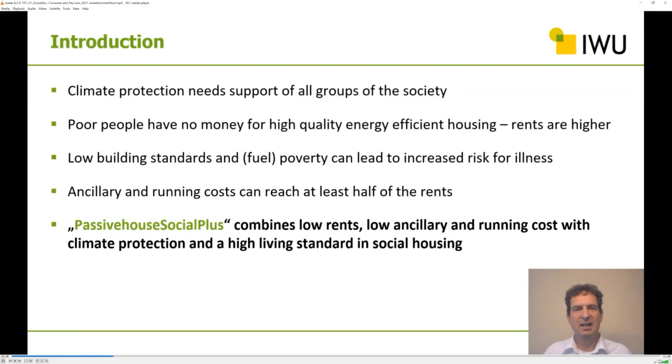These issues should be eliminated by the Passive House Social Plus, from an organization called Neue Wohnraumhilfe in Darmstadt. The Passive House Social Plus combines low rents, low ancillary and running costs with climate protection and high living standards in social housing.

The goals of the Passive House Social Plus were: build inexpensive flats for affordable living; significantly reduce ancillary costs for heating, electricity, and internet; achieve high energy efficiency for the building envelope, hot water preparation, household electricity, and system technology; use treated grey water to flush toilets; use photovoltaics and battery storage; apply a flat rate rent for most ancillary costs including heating and domestic hot water preparation, plus a budget for drinking water and household electricity included in the rent; and finally provide visualization of consumption and budget for tenants.

Now I'd like to show some pictures of the project. The building is situated on a former US Army military site. Here you can see the building before the retrofit - it consists of 3 stories with 3 entrances. Two of the three entrances were retrofitted with passive house components, and the third entrance was removed and replaced by a new building in passive house standard.

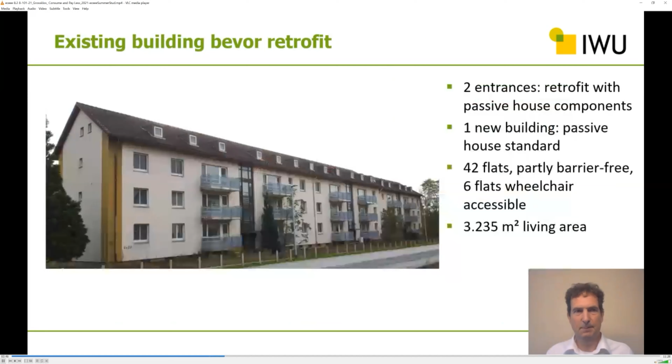At the beginning, the existing building was dismantled down to the building shell. A new top story was added to increase the living space. The building envelope was thermally insulated, and each flat has its own ventilation system with heat recovery.

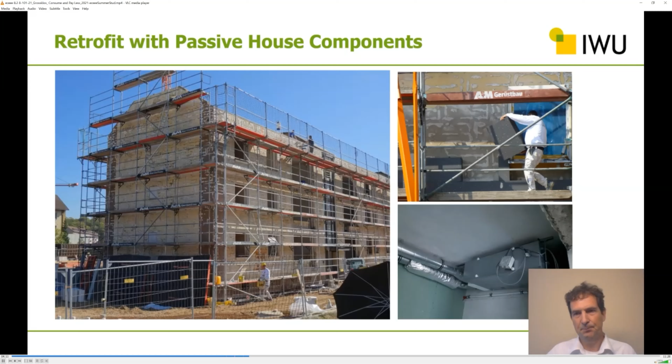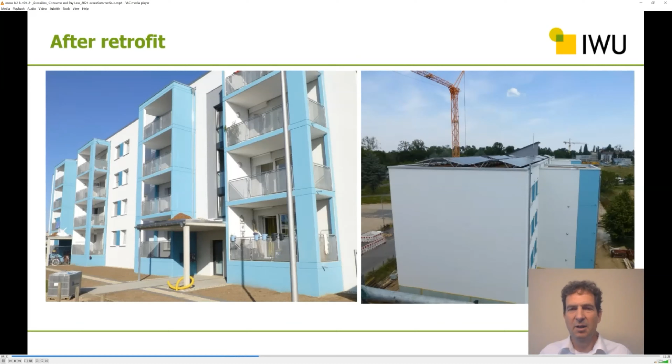You can see the existing building after the retrofit. On the right side, you can see on the roof of the building the photovoltaic system.

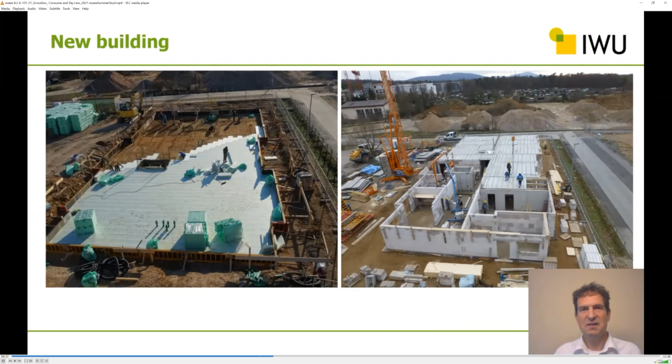Here are some impressions from the interior of the buildings. On the left side, a view of the barrier-free bathroom, and on the right side, a view of a kitchen, which is pre-installed by the landlord with very energy-efficient kitchen appliances, and also LED lighting in every room, to reduce energy consumption.

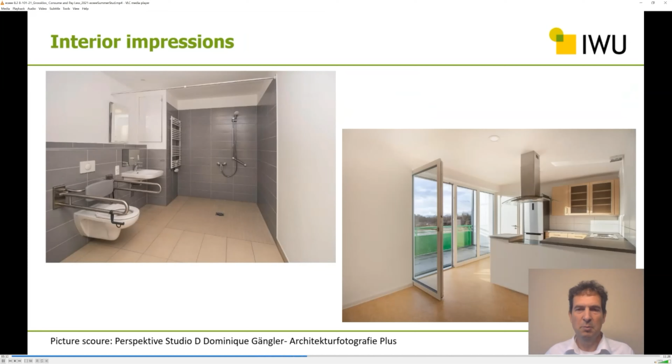As already mentioned, both buildings have PV systems. The existing building has about 40 kilowatt peak power on the roof and a battery storage of 18 kilowatt hours. The new building has about 44 kilowatt peak power PV and a much bigger battery with 43 kilowatt hours.

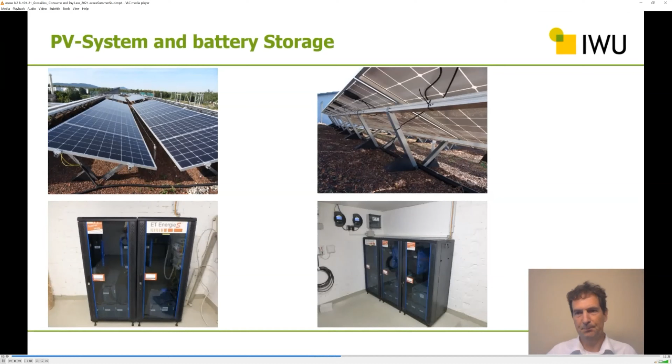Another important issue of this project is the grey water system. Slightly polluted water from the showers is collected separately, then filtered in the basement and treated biologically, and the cleaned water is then used for flushing the toilets, reducing the consumption of drinking water.

For the accounting, almost all ancillary costs are charged as a flat rate, including the costs for heating and domestic hot water according to German legislation. The costs for water and household electricity are not included as a flat rate but as a budget, and this budget is calculated so that an economical household can get along with it.

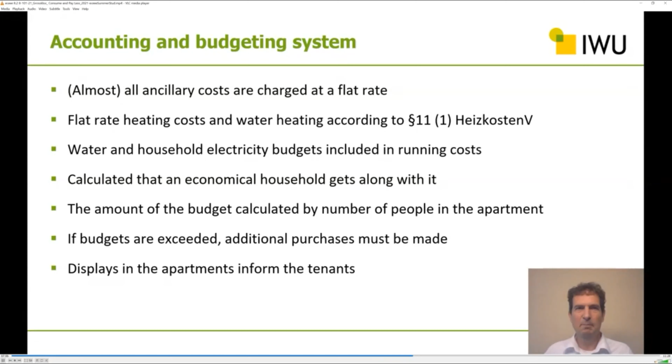The amount of the budget is calculated by the number of people in the apartment, and if the budget is exceeded, the tenants have to purchase an additional quantity. There are also displays in the apartments for the tenants to know how much of the budget they have used till now.

Here you can see one screen of the display showing on the left side the budget for electricity and on the right side the budget for domestic water. If the budget is exceeded, the tenants get a warning and a calculation of how much they probably must purchase.

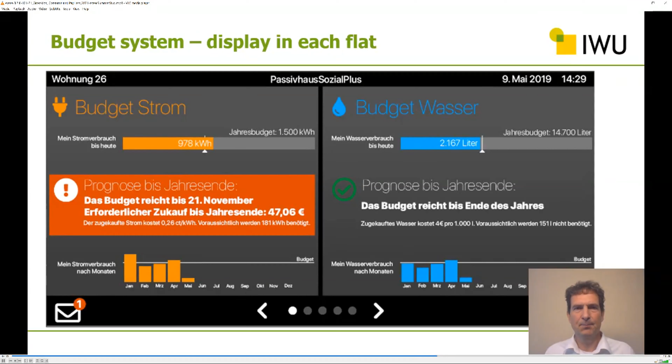The buildings were finished in 2019, and now I'd like to show you some results from the measurements for the existing building. The mean room temperature in wintertime was 22 degrees Celsius, which is comparable with other energy efficient buildings, even if they have a heat billing.

The measured energy for heating, including distribution losses, was 21.3 kilowatt hours per square meter and year, which is quite low. For domestic hot water, we measured 17.8 kilowatt hours per square meter, and the total consumption for district heating, including all losses in the building, was 48.9 kilowatt hours per square meter.

The grey water cover ratio for flushing the toilets was only 20 to 40% at the beginning. But last summer, a new filter was added, and after that, the cover ratio rose to values greater than 60%.

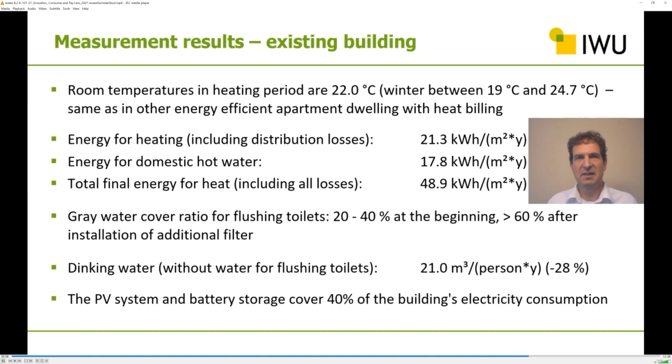The drinking water consumption, without the water for flushing the toilets, was 21 cubic meters per person and year, which is 28% below the comparable mean value in Germany. And the PV system, in combination with the battery storage, covers 40% of the building's electricity consumption.

For household electricity, I'd like to show you some detailed results. In this diagram, you can see on the x-axis the power budget per flat, and on the y-axis the power consumption per flat. The bisecting dotted line shows those points where budget and consumption are equal.

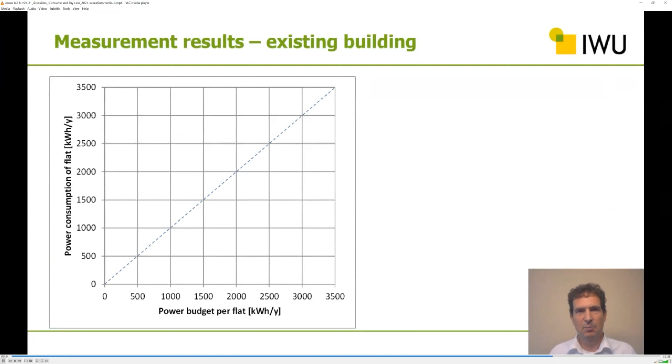Now you can see the results of the 22 flats as dots. Some are below the dotted line, meaning the consumption is below the calculated budget, and some are above. On average, the budget is exceeded by only 2%, which is remarkable because it was calculated according to the best energy efficient standard in Germany for electricity, Class A. So in total, the household electricity consumption is very low.

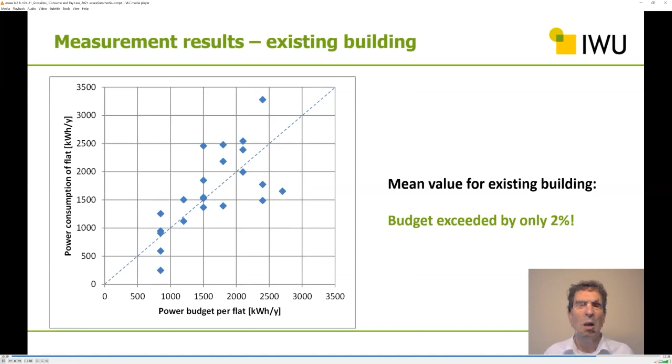Now I'd like to summarize the main results of the project. We have a high energy standard in combination with a ventilation system as a base for healthy living for the tenants. The rents are at €6.50 per square meter and month, well below comparable rents in the same city, which are above €10 per square meter and month.

The ancillary costs are 45% below those of comparable users in the same city. And despite the flat rate billing for heat and domestic hot water, we have very low heat consumption. The budgets for drinking water and household electricity are only slightly exceeded, so the approaches for reducing consumption and costs seem to work also in social housing.

Now I'm at the end of my presentation, and I'm looking forward to your questions.

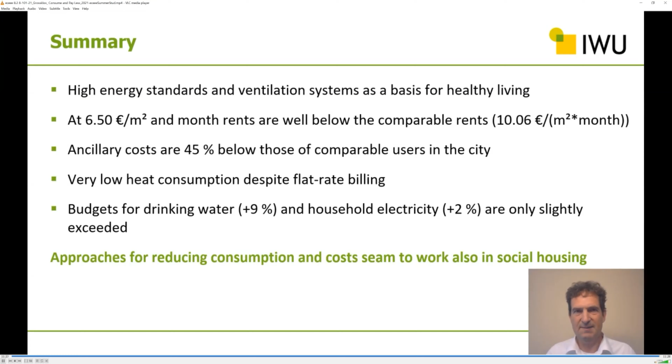I have a general question regarding setting up this system. Do you think it would be possible to have all the energy suppliers throughout Europe, or throughout the world, or throughout a city, to work with such a system? I think you've proven that it works, but the big challenge is getting energy suppliers to buy in. Have you had any considerations about that?

In this region, we have district heating, so every house has to be connected to it, and there's no question that the landlord has to use this energy source. Of course, in other regions you don't have the same energy sources, and maybe other solutions are cheaper. As discussed in other sessions this morning, in another region heat pumps maybe are financially more welcome, but this is a question for every special project. In general, when you reduce energy consumption, as with passive houses or nearly zero energy houses, all the houses have low consumption, so this isn't a special topic of this building or project.

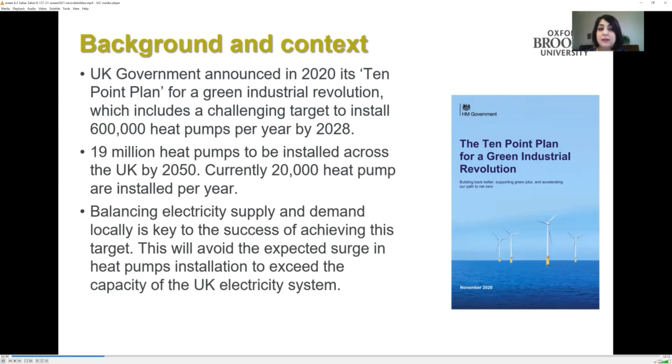In addition, 19 million heat pumps need to be installed across the country by 2050, which will be a step change from the 20,000 heat pump units currently being deployed across the country every year. To achieve this target successfully, it's important to balance electricity demand and supply locally, which will also avoid the expected surge in heat pump installations exceeding the capacity of the current UK electricity system.

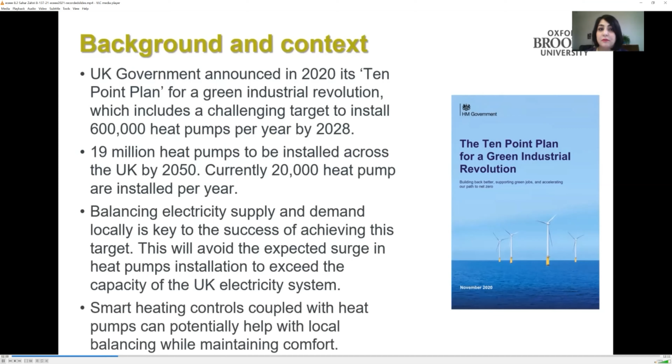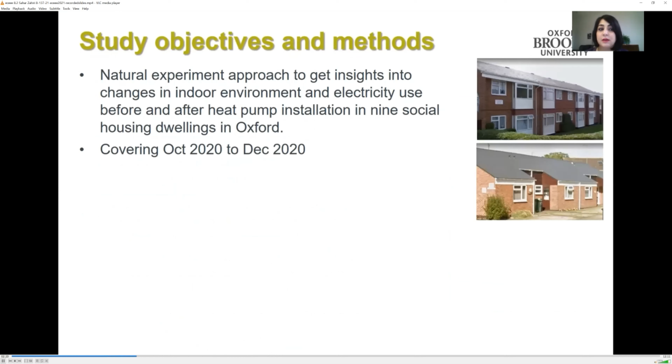Deploying smart heating controls coupled with heat pumps can also help with local grid balancing while maintaining resident comfort. With this context, this study used a natural experiment approach to get insight into changes in indoor environment and electricity use, pre and post heat pump installation, across 9 social housing dwellings in Oxford.

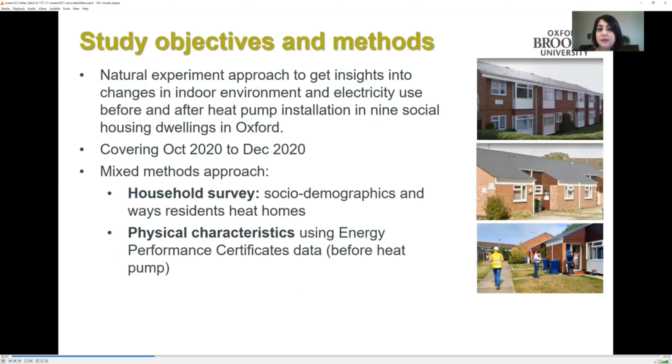The study used a mixed method approach, including a household survey to identify socio-demographics and ways residents heat their homes, physical characteristics using energy performance certificate data before heat pump installation, and monitoring of indoor temperature and relative humidity in 9 dwellings at 15-minute intervals using Bluetooth-enabled hobo data loggers located in the living rooms of each dwelling.

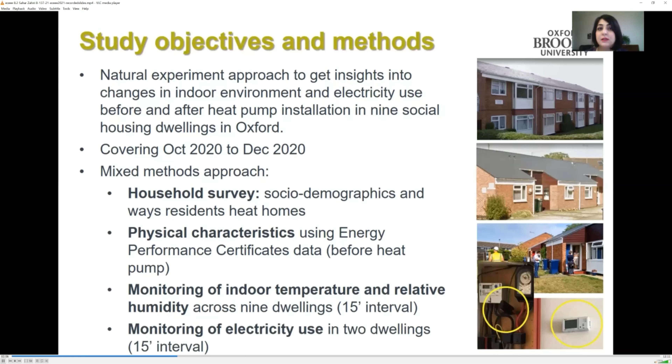Electricity use was also monitored in 2 dwellings with 15-minute intervals using a loop device, which was connected to the electricity meter of each dwelling.

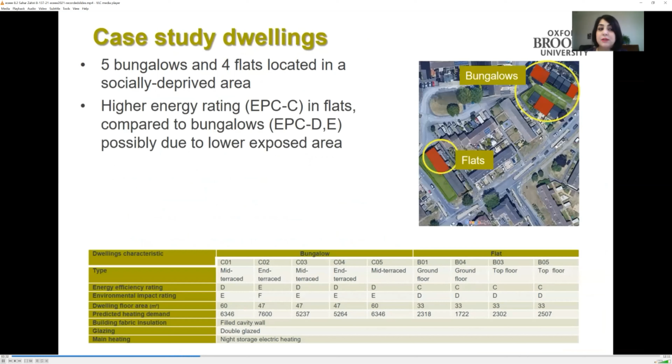The 9 dwellings included 5 bungalows and 4 flats located in a socially deprived area in Oxford. From EPC certificates, higher energy ratings were identified in flats compared to bungalows, with EPC of D and C. This was possibly due to the lower exposed area in flats compared to the bungalows. EPC data also showed higher predicted heating demand in bungalows compared to flats before heat pumps.

In order to improve energy efficiency of bungalows, filled cavity walls were installed following the installation of heat pumps in autumn 2020.

Studying the household characteristics showed no association between annual income and annual energy cost, although all dwellings had single occupancy and the average annual income of the residents was less than £15,000.

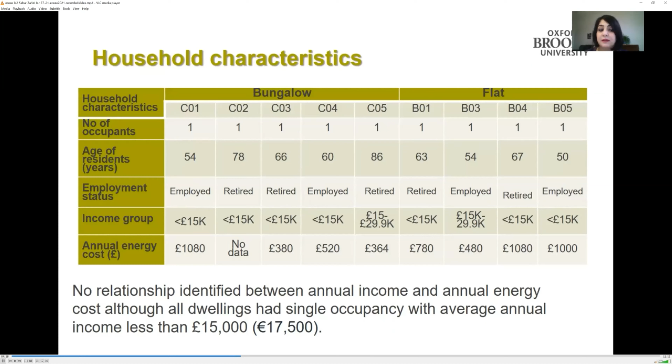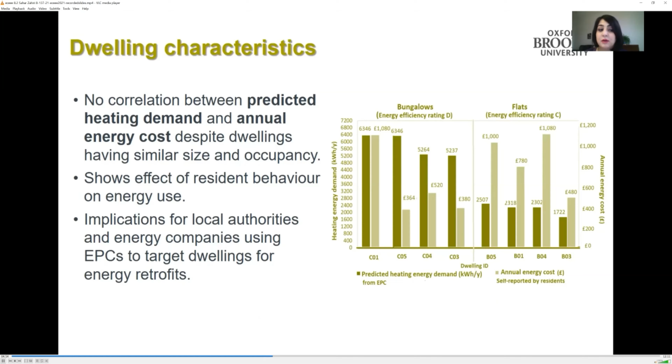Similarly, there was no correlation between predicted heating demand obtained from EPC and annual energy cost self-reported by residents, although all dwellings had similar size and occupancy. This confirmed the impact of residents' behavior on energy use compared to dwelling characteristics and household characteristics. This can also be an implication for local authorities and energy companies who use EPC to target dwellings for energy retrofits in the future across the country.

Studying the environmental monitoring data across the 9 dwellings shows interesting results. A significant increase was observed in indoor temperature in bungalows after heat pump installation. This was due to the improved air tightness along with constant heating compared to flats. The mean indoor temperature in bungalows increased to 23.4 degrees Celsius after the heat pump, from 20.4 degrees Celsius pre-heat pump.

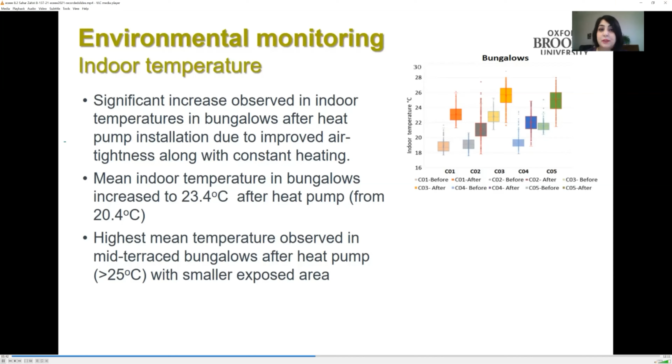I think we faced a technical problem. But given that we are all here and Mark is here, I would like to ask another question.

Not sure if I understood this well. Did the social housing body increase the rent for these dwellings? And if so, did it lead to a renewal of the tenants?

No, the buildings were empty before retrofit because it was a former army site. So in 2019, all tenants moved in, and since then there was no change of tenants till now. The project is quite new, so there was no renewal of tenants, but we did have a different type of users, though that's not because of the refurbishment.

Ranging from extremely low to extremely high, however, after installation of heat pumps, due to the continuous heating as indicated by higher indoor temperature, indoor relative humidity reduced significantly in bungalows compared to the flats. The changes in indoor relative humidity in flats were subtle, in line with minor changes in indoor air temperature after heat pump installation.

Moving to the next slide regarding electricity use analysis: an increase in daily electricity use was identified across the dwellings after installation of heat pumps. This was due to the colder weather and constant heating. In addition, daily electricity use in flats after the heat pump was lower compared to bungalows, also due to residents' preferences to keep windows open when the heating was on, which was observed during site visits.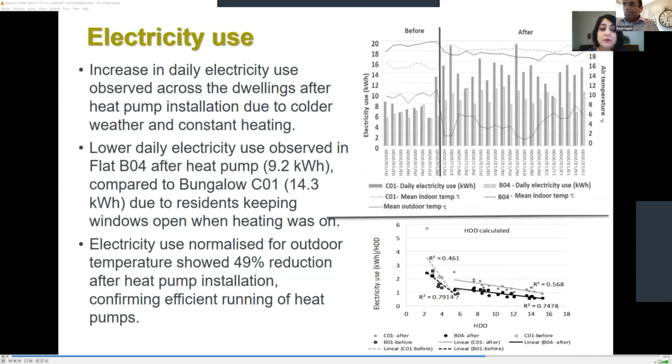To assess the efficiency of the heat pumps and account for weather, electricity use was also normalized for outdoor temperature, showing a 49% reduction after heat pump installation. This confirms the efficient running of the heat pumps despite the user preferences.

In addition, mean daily indoor temperature and electricity use profiles showed a rise in electricity use during the peak periods from 4 p.m. to 7 p.m. This reinforced the need to integrate time-of-use tariffs to encourage load shifting amongst residents. It's also worth noting that despite more distributed electricity use during daytime after heat pump installation, it's important to utilize renewable electricity locally for grid balancing and to reduce network pressure.

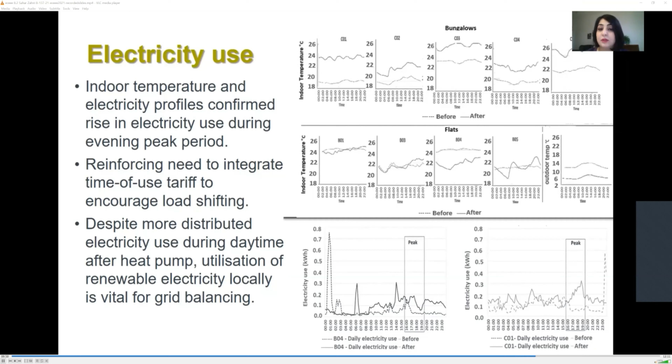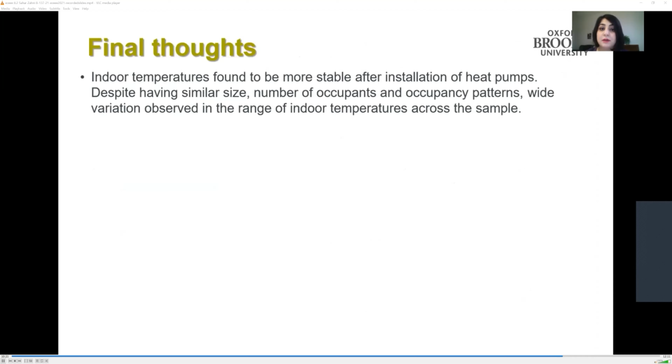And finally, to sum up the findings discussed in this presentation, we can conclude that indoor temperatures were more stable after installation of heat pumps across the dwellings. However, wide variation of indoor temperature ranges was identified across the dwellings, despite having similar size, number of occupants and occupancy patterns.

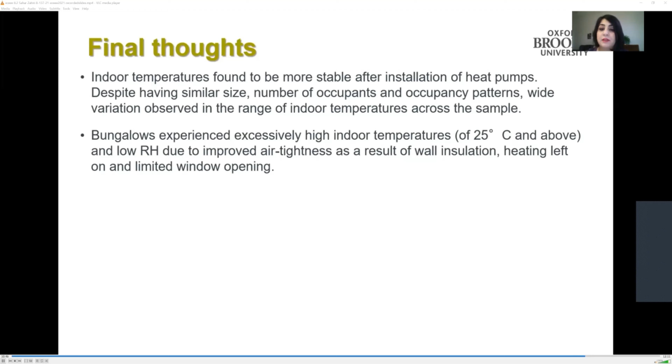As compared to the flats, bungalows experience excessively high indoor temperature of 25 degrees Celsius and above, and consequently low indoor relative humidity due to the improved air tightness as a result of cavity wall insulation, continuous heating, and limited windows opening.

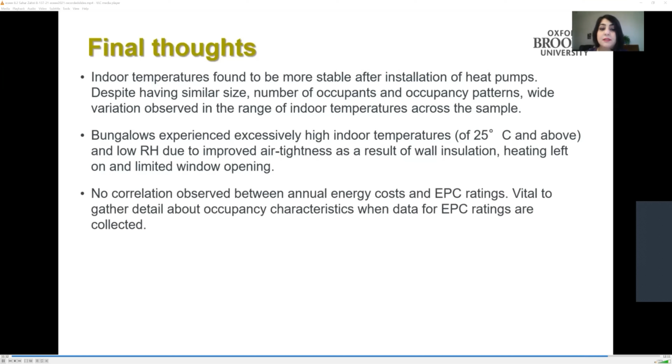Since no correlation was identified between annual energy cost mentioned by the resident and EPC rating, it's important to obtain details about occupancy characteristics when data for EPC rating are collected.

An increase in electricity used for heating during the evening peak, especially after heat pump installation, makes a strong case for connecting these dwellings to time of use tariffs with different prices during peak and off-peak periods, which is in line with wholesale prices.

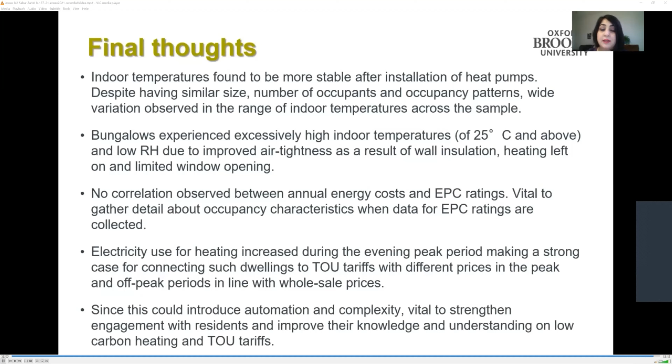However, since this can introduce automation and complexity for residents, it's important to strengthen engagement with residents and improve their knowledge and understanding of low carbon heating and time of use tariffs, to get the best benefits of heat pump installation and smart heating control.

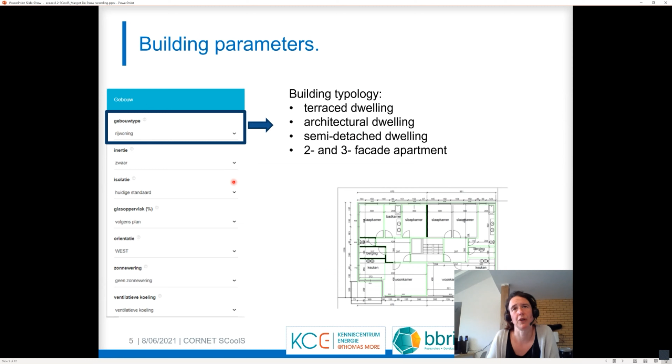Then I will go quickly through those building parameters. First, we have to select a building type or building typology. We have 5 fixed typologies for residential buildings, meaning we work with given building plans, which makes it user-friendly. But of course, in that way, it's not possible to evaluate your own specific case.

Then we also can choose the thermal mass, between massive or lightweight. For insulation level, we work with new buildings, so we can choose between the current EPB standard or passive building level. For some building typologies, we can also choose a higher window percentage than what is on the building plans. And then, of course, we can change the orientation of the building.

And then finally, we also can apply some passive cooling strategies. The first is sun protection, so we can choose between no sun protection, external screens on all windows, or natural ventilative cooling. The first option is with small window openings, which are burglar-proof. Then we have another option with intensive ventilative cooling with large window openings, where you will need some grills or something like that.

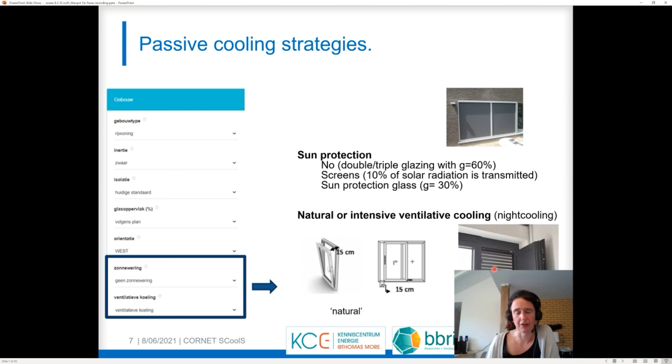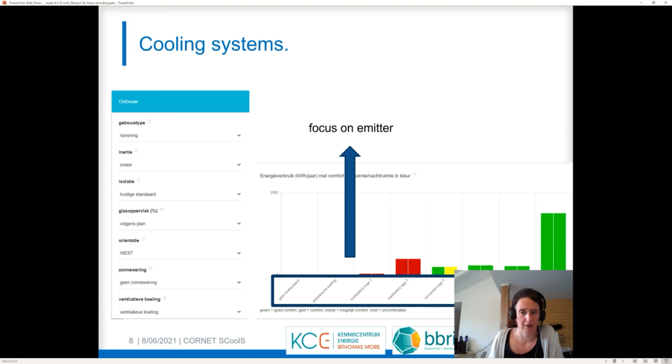When you have selected all your building parameters, you can go to the results for different cooling systems. As I said, the focus is on the emitter. You can see it on this listing of the cooling systems that we considered.

First of all, we have some systems on the ventilation, like adiabatic cooling on the return of the ventilation unit. We also have cooling coils in the supply air of the ventilation, one at high temperature and one at low temperature. We also have some hydronic systems.

First of all, two convective cooling systems, one with a capacity of 15 watts per square meter. The idea is that it's a convective system connected to a geothermal source, principally dimensioned based on the heat demand, so the power for cooling is limited.

But we also consider a convective system with almost unlimited cooling power, going to 50 watts per square meter. It represents, for instance, an active cooling system where there is not really a restriction on the capacity.

Then we have two types of floor cooling. The first one is a light system, the second one heavy, with the pipes in the concrete. They also have different power, 20 and 30, and there are also differences in insulation. The idea was to have two different types, and we see in the results that there is not really an important difference between the two.

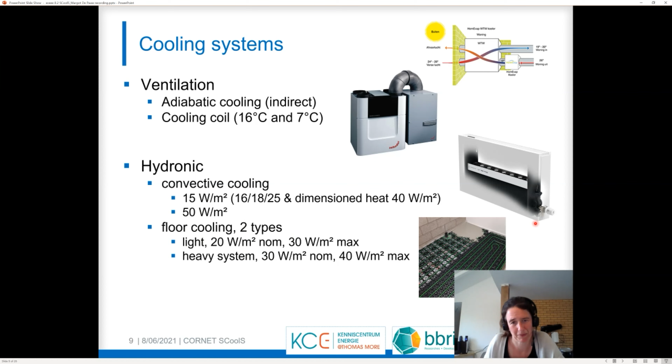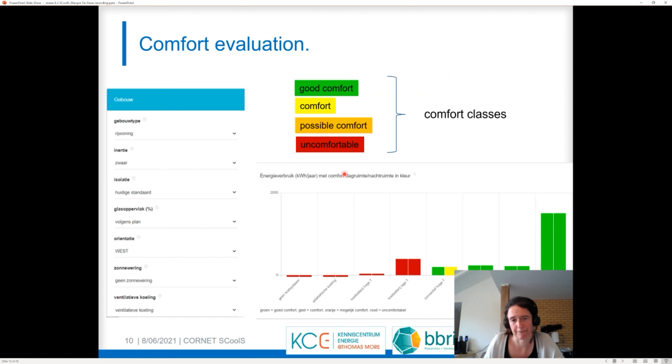Then I come back to those comfort classes. The idea was to work with colors: green means good comfort, going to red, which means it's uncomfortable. But it's not so easy to say what is good comfort.

So we will have a look at the definition of comfort classes. But when we talk about comfort, it's always somewhere related to the weather file that we use, so I will start with that.

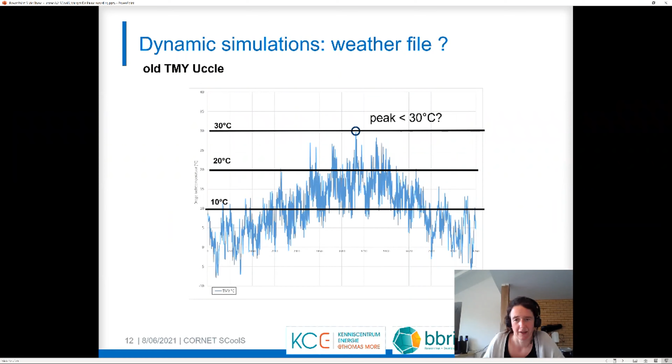Here you can see the TMY file for Uccle, Belgium, and you see that the maximum outdoor temperature is not even higher than 30 degrees. If you compare that to the weather files for the recent 4 years in Belgium, you see that the old TMY file is not representative for the summers that we had, or the last summers that we had.

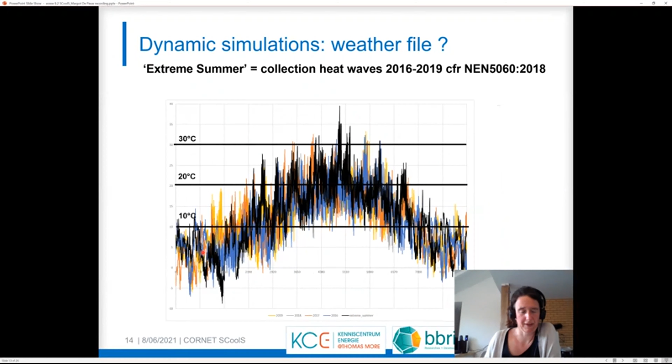So we decided to build a new weather file, and that came out to be the black line on this graph. It is based on the most severe heat waves of the last 4 years. In the meantime, future weather files were built in the framework of Annex 80.

It was based on the Cordex future weather data, and then we see that there is a good match between those future weather data and the data that we used for our simulations. So in fact, we can say that our weather file is future-proof.

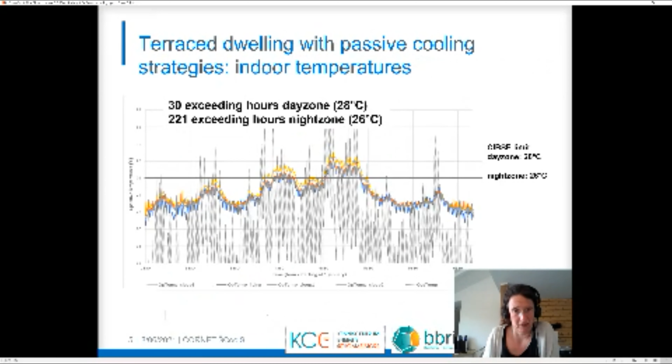Coming to the comfort evaluation, here you can see for the terraced dwelling with passive cooling strategies, in black the outside temperature, and then in different colors the internal temperature for different rooms. The temperature limits according to CIBSE are also indicated.

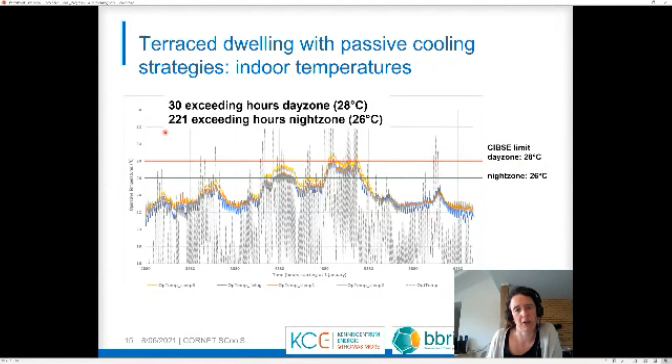In green for the night zone, the maximum temperature is 26 degrees, and then for the day zone in red, the maximum temperature is 28 degrees. You can see that there are some comfort issues, especially in the night zone, where we have more than 200 exceeding hours.

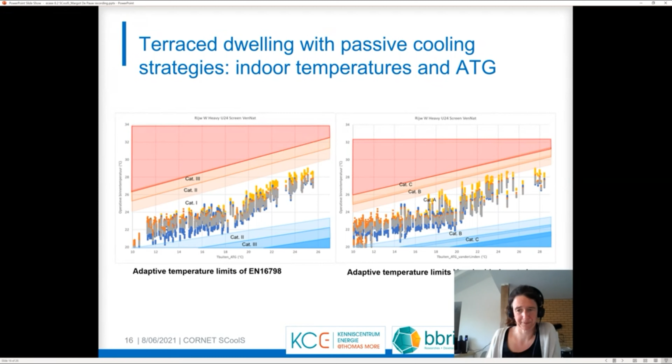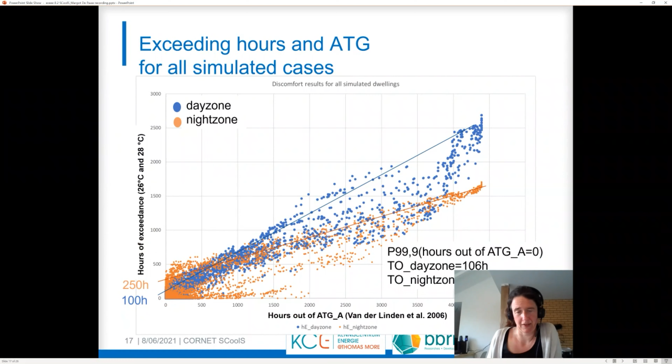And this brings us to this definition of comfort classes, which are all based on exceeding hours according to CIBSE.

Good comfort means that they meet the absolute criteria. But then we also defined two comfort classes based on those limits of 100 and 250 hours that we derived from this graph. This means that cases within category A of van der Linden will end up in one of those classes. And when we have more than 250 exceeding hours, then we can say it will be discomfortable. So these two classes help avoid false negative ratings of comfort.

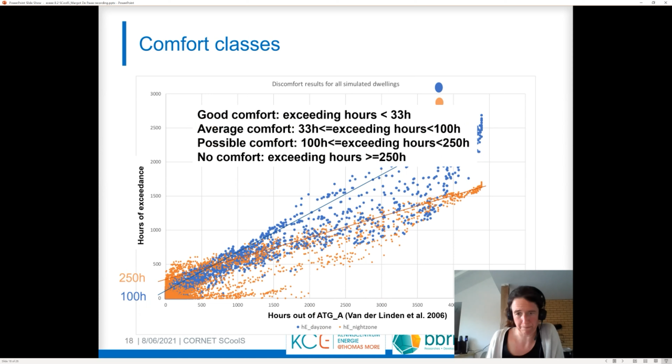When we apply that on the case of the terraced dwelling, we can see that for the day zone we have good comfort. For the night zone, we will have possible comfort, or the orange color.

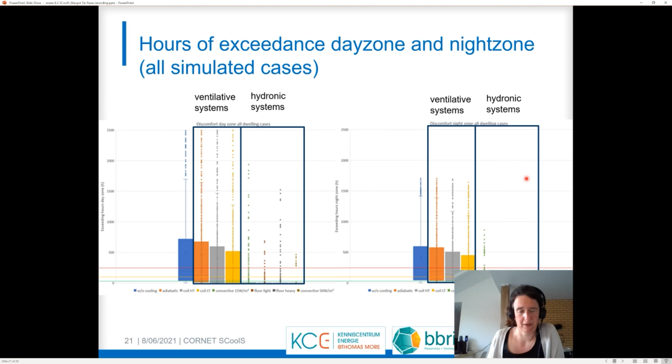Here we see that for the cases with no cooling system, 50% has discomfort in day or night zone. This means they have exceeding hours more than 250, so they are above the red line. For ventilative cooling systems, this is 40%. But when we go to the ventiloconvectors with a capacity of 15 watt per square meter, 80% is in the class of good comfort.

So the green class below the green line here. And when we look at floor cooling, it's even better.

So when we know that those hydronic systems have a capacity between 15 and 50 watt per square meter, it can seem a bit surprising that performance is so good, because we also calculated in the simulations the maximum power needed to maintain a constant inside temperature of, for instance, 24 degrees. For all the cases, it's on average somewhere between 20 and 40 watt per square meter. But the fact of allowing a temperature variance going to 26 or 28 degrees, which are in fact the comfort limits that we used, lowers the necessary cooling capacity. And that's very interesting, especially for sustainable cooling systems, because they often have a limitation on their capacity.

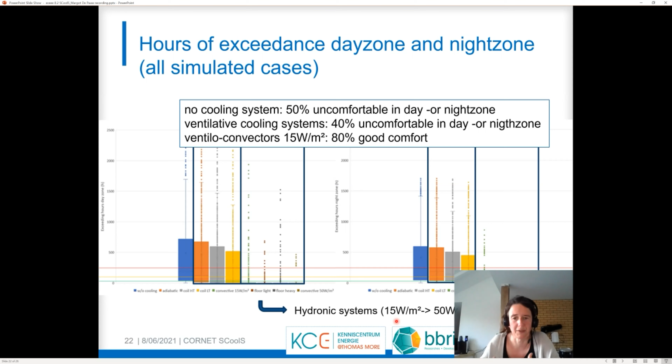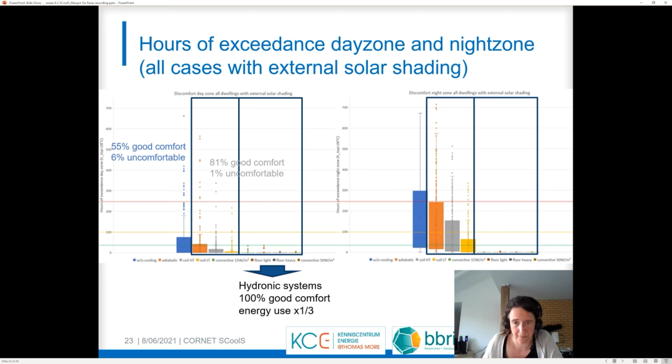But we can apply that other passive cooling strategy, ventilative cooling. And then we see that, watch out, the red line for discomfort is here now. So we can see that practically all the cases have an acceptable comfort, practically all below the red line. But you see also that in the night zone, when you really want to guarantee a good comfort, getting below the green line, then you need at least something like a cooling coil at high temperature.

And then in general, we can also say that those passive cooling strategies, so solar shading and ventilative cooling, prove to be much more important than, for instance, the degree of insulation or the inertia of the building.

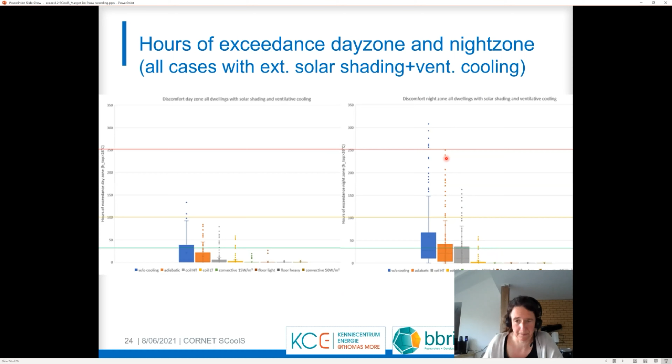So we can come to some conclusions. First of all, comfort criteria for summer comfort appears to be difficult, especially in residential buildings. Then a combination of passive strategies and sustainable cooling systems is preferable. First, in the design phase, cooling loads will be smaller. Then cooling capacity is reduced, meaning we have more possibilities for emitters at high temperature, and we will have less impact on the electrical grids in summer. Finally, energy use of cooling can be considerably reduced by using a free cooling source in combination with passive cooling systems.

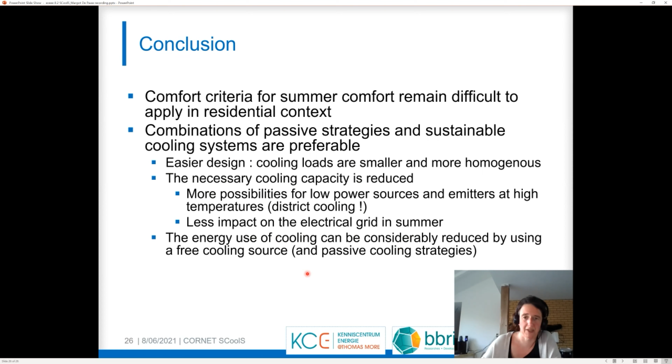What a great presentation. I'm a window manufacturer, and I'm a window manufacturer, and we are selling windows and solar shadings. This was tremendously interesting what you showed here.

I have two questions. You mentioned somewhere in the end of your presentation that strategies for passive cooling were better than insulation of the building. That was one thing.

And then the other thing I would like to ask is if you have opened the window slightly more than the 15 centimeters that you used in your calculation. I fully understand why you talk about 15 centimeters, because you want to have burglary resistance solutions. But have you tried to include rapid ventilation also for the period where it's hot outside, before you go to bed, to make a rapid ventilation of your home? Have you included such a thing?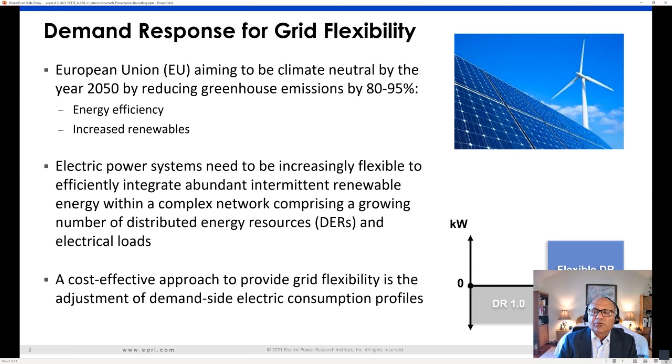What were the project objectives? Our objectives were to evaluate the capabilities, communications, and controls in smart gateways and controllers for heat pumps for demand flexibility. We wanted to assess and demonstrate communication signals, especially new signals called OpenADR 2.0b communication protocol - how well does it work? We wanted to identify commercially available controllers and gateways that can receive such signals and be used for flexible demand response. Finally, if such gateways were available, what are the potential hardware and software options to control other residential end uses, such as lights, appliances, etc.

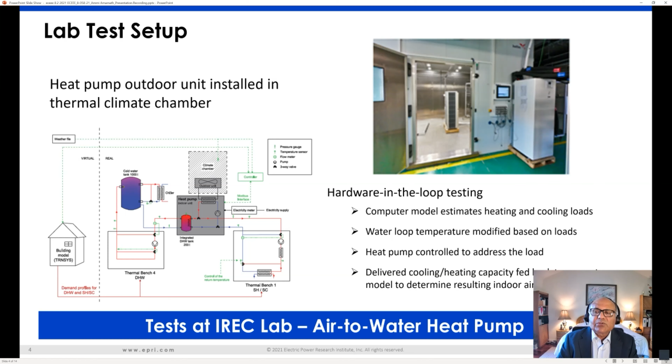The laboratory test setup was in IREC Tarragona, like I mentioned earlier. This is a heat pump outdoor unit that was installed in a thermal climate chamber, as shown in the photograph on the right-hand side. What we did was hardware-in-the-loop testing. In other words, there was a computer model developed to estimate heating and cooling loads in residential applications in Spain especially. Water loop temperatures were modified based on these loads. The heat pump was being controlled to address these loads, and it delivered cooling and heating capacities to the resulting indoor unit.

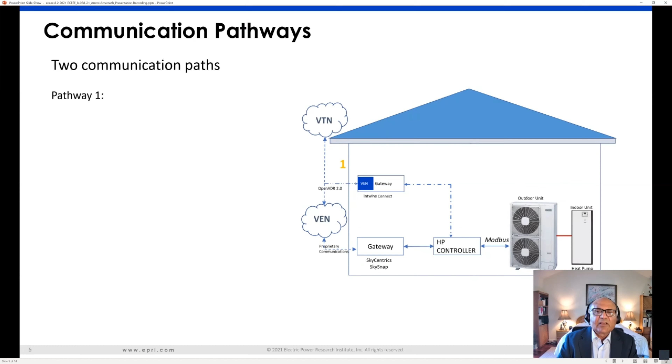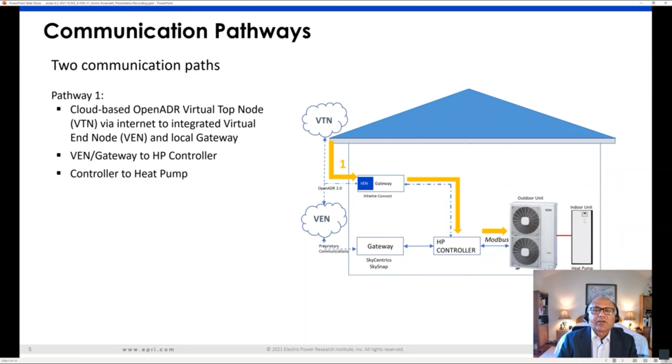In terms of communications, how do you communicate signals to a heat pump from the energy service provider? Usually there is a top node called a virtual top node, which can send signals. We looked at two pathways. Pathway one was to have an OpenADR virtual top node, or VTN, send a signal to an integrated virtual end node, or something that receives a signal, and a gateway located inside the residential premise. From the gateway, a signal goes to the heat pump controller, and from the controller, the signal goes to the heat pump to do the appropriate thing by increasing or reducing the speed in order to increase or reduce the amount of energy used.

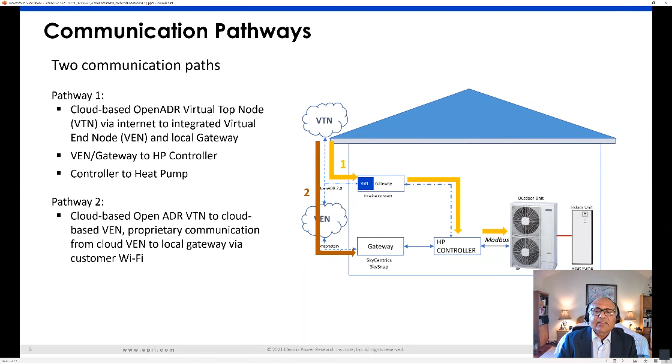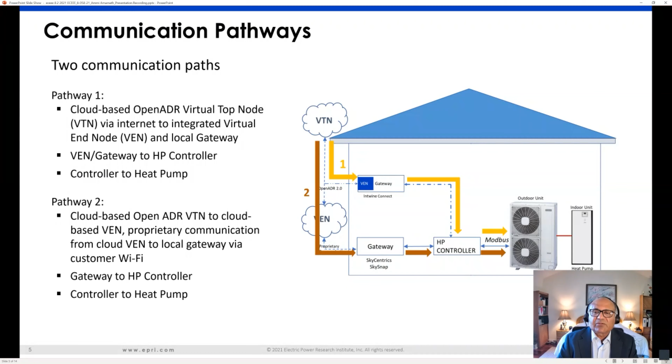That's one path. The second pathway was to send a cloud-based signal from the VTN to a cloud-based VEN, and then from that VEN to the gateway located inside the residence using a proprietary communication protocol. From the gateway to the heat pump controller again, and from the controller to the heat pump to control it. So this was the schema we used for this testing.

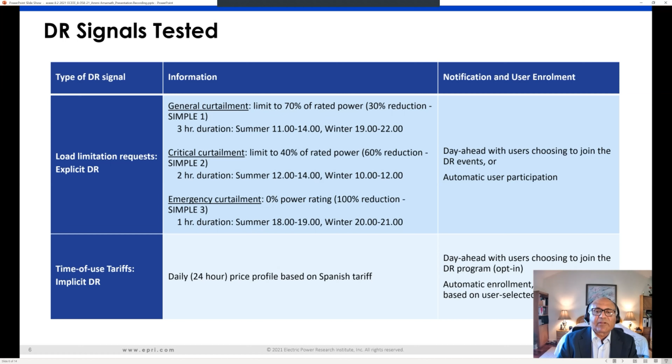What was the heat pump control logic used to control these? For explicit demand response, it was standard thermostat control with power limitation capability - in other words, a rule-based control. For implicit DR, there was a rule-based control depending on price, and we also did another implicit DR which is model predictive control. Rule-based control is just to reduce energy cost, while model predictive control is to maximize as much comfort as possible while also reducing energy cost. So if one could understand what the price is tomorrow or the day after, can you take appropriate action today to maximize your comfort? That's really what we tried to do.

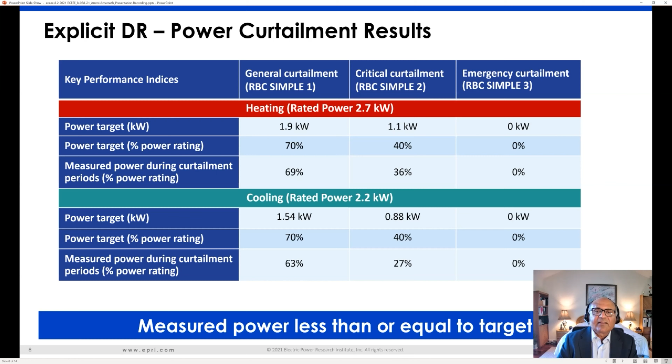These were the experiments that we tried. So what did we find? We did this both in heating and cooling modes. For the target power for explicit demand response, the rated power for the unit tested was 2.7 kilowatts. The target power with 30% reduction was 1.9 kilowatts, and in fact our measured power was less than that. Similarly, for 60% reduction, we saw similar results, and even for complete shut-off we saw similar results, as well as for the cooling applications. In other words, the measured power was less than or equal to the target, which tells us that the demand response signals worked.

I mentioned implicit DR, which is price-based. For price-based signals, we did both rule-based control and model predictive control. For rule-based control, we saw for heating applications a 48% reduction in energy cost, and for cooling applications, a 58% reduction in cost. Model predictive control also resulted in cost savings, but not as much, because remember, we wanted to increase comfort for the customer as well.

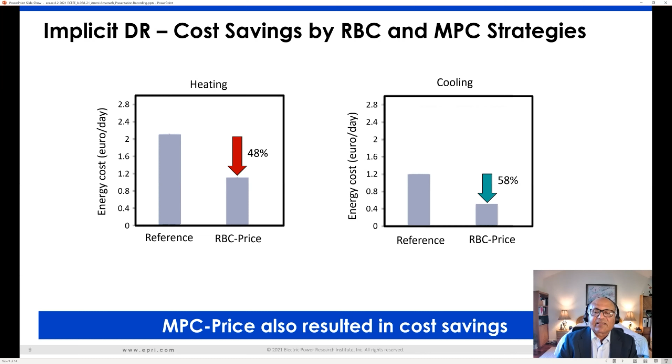So this is good. The heat pump demand response works. There is some sort of comfort for the customer, and at the same time, the customer can save money. So what does it mean for the energy service provider? How can they use this to build new business models?

We thought of two separate business models. One is serving the customer, and the second is serving the grid. For serving the customer, it's the smart home solutions. In other words, this energy service provider could supply a smart home energy management system called HEMS, or in the US nowadays, they call it SHEMS.

The second one is really to build a business on telling the customer how much energy they are consuming and what kind of recommendations they can take to reduce the amount of energy used or to reduce their cost. So one is a service related to doing the complete home energy management system, and the second is to do more analytics for the customer. This is on the customer side of the business.

From the grid side, an energy service provider could provide the same sort of service to understand how the grid can be flexible and how such demand response can provide support to both the operation of the grid and also to the transmission and distribution assets of the grid. And the implicit demand response for optimal time of use controls — what type of tariffs or pricing mechanisms can be put in place in order to optimize the value for the customer.

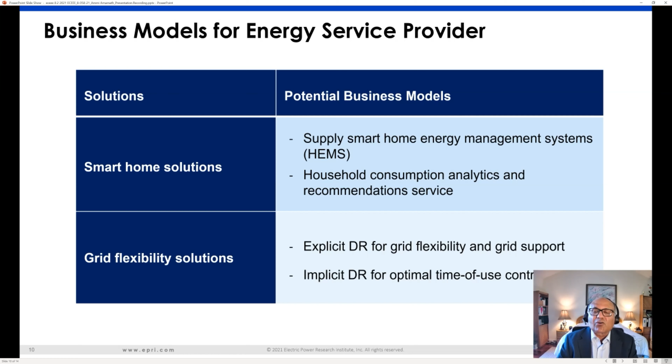So these are the different business models we came up with. I mentioned smart home solutions. So if one could essentially think of this gateway that we tested here in this technology, this gateway is connected to the heat pump through a specific protocol — in this case, a Modbus communication protocol.

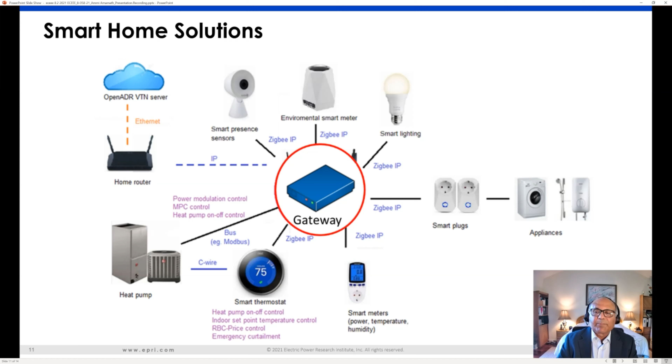But if the gateway were to be multi-protocol, then this gateway could also control other things such as lights, such as appliances in the house, all of which have different communication protocols. So it's important to have a multi-protocol gateway that can control not only the heat pump but also all other equipment. That will increase the value for both the customer, in understanding how much energy different pieces of equipment are using, and for the service provider, in providing the correct solution. So this is the business model that I talked about.

So finally, in conclusion, our tests showed that the heat pump control technology is a promising technology for demand response applications. The curtailment strategies we used achieve space conditioning power limitation targets with accuracy, and we could reproduce it. The rule-based, predictive, and price-based controllers efficiently shifted loads from high to low energy cost periods. We saw a 48% cost reduction for RBC price in heating mode and 58% cost reduction in cooling mode.

One important question is, what kind of communication protocols work? OpenADR 2.0b, which is widely used in the United States, is a highly secure communication standard that can indeed be deployed for DR programs in Europe. Actually, it's now being developed and applied in the United States in many states, so it could be tested. We tested the OpenADR gateways and saw good signals, good transference of signals to the heat pump controllers.

Another important thing we saw, which I didn't mention earlier, is that energy and power rebound effects were not significant — once the demand response event is over, is there a rebound? There wasn't a significant one, but to really do good tests, one needs field tests with multiple heat pumps to understand that synchronous dynamics.

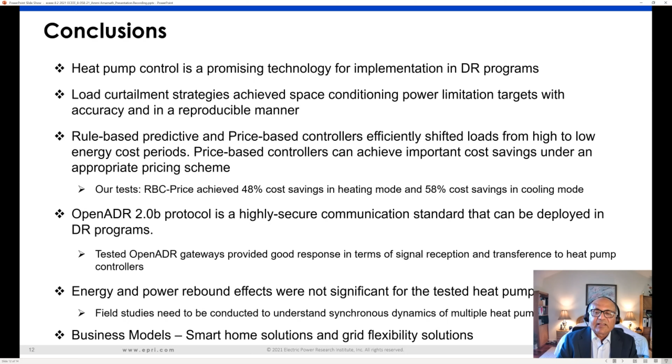Finally, as I mentioned, the business models for smart home solutions and grid flexibility solutions are good examples of how this can move forward for energy service providers in a business sense.